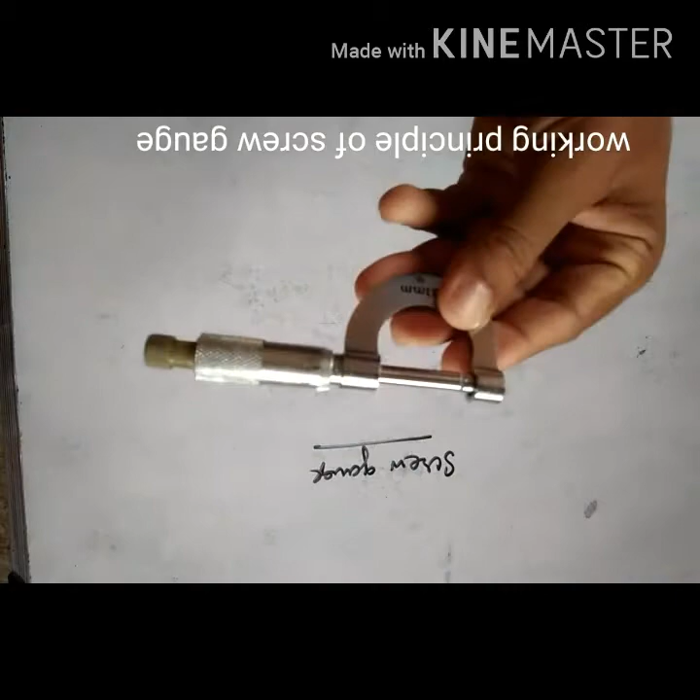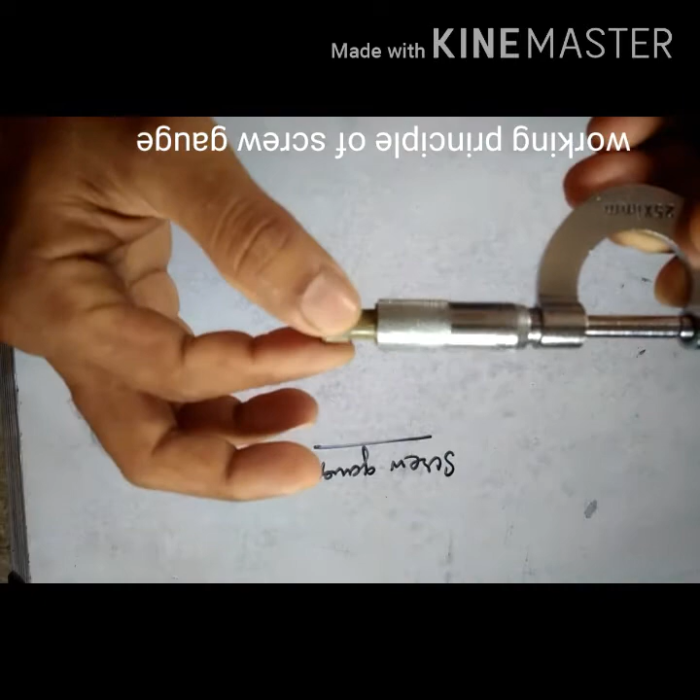Now we are ready to discuss the working principle of the screw gauge. This is the screw gauge, and the screw gauge has a screw at the end of this arm, and with the help of the screw we can rotate the circular scale as well as take the readings. So that is why it is the screw gauge.

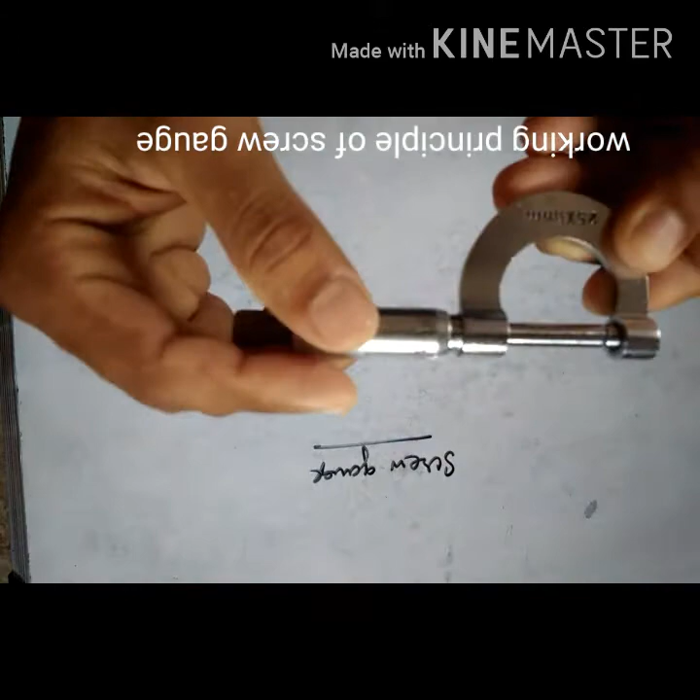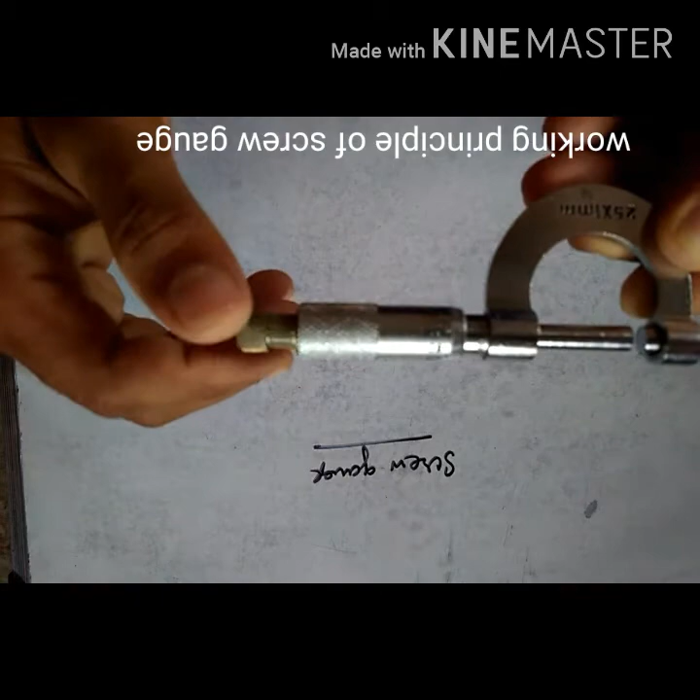When we rotate this side, the gap between these two portions increases. Otherwise we can decrease the gap by rotating the circular scale in the opposite direction. So here we see that the circular scale contains 100 divisions. The numbering starts from 0 here and ends at 100.

For an errorless screw gauge, the 0 mark of the circular scale must coincide with a linear line under the circular scale. So this is 0. Then we read 10, then 20, then 30, then 40, then 50, then 60, then 70, 80, 90, and again comes 0, that is equal to 100. So there are 100 divisions in the circular scale.

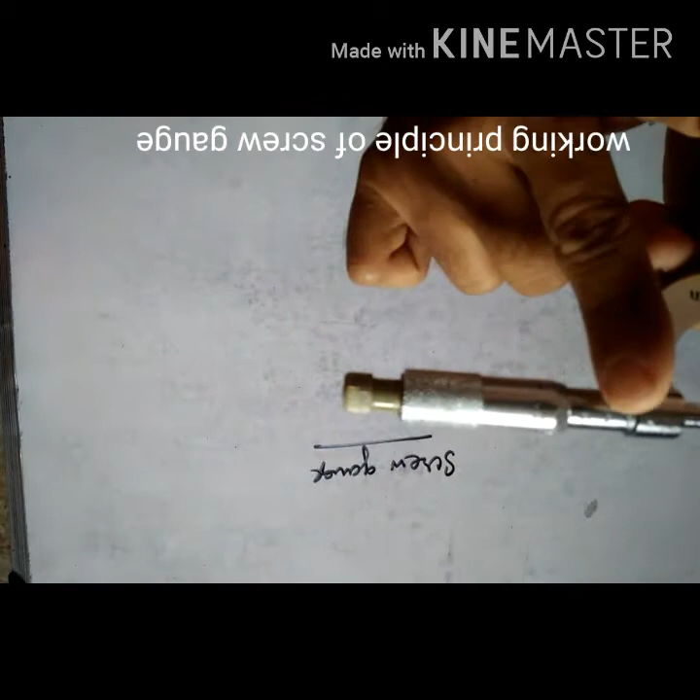And if we coincide the 0 of the circular scale with the horizontal line just under it and rotate just one complete rotation, so it again comes to 0, then only one division of the main scale or linear scale is revealed here. So what is the value of that one division? We can see that this is 0 and this is 5 in the linear scale, just behind this screw. This is the circular scale portion and this is the linear scale portion.

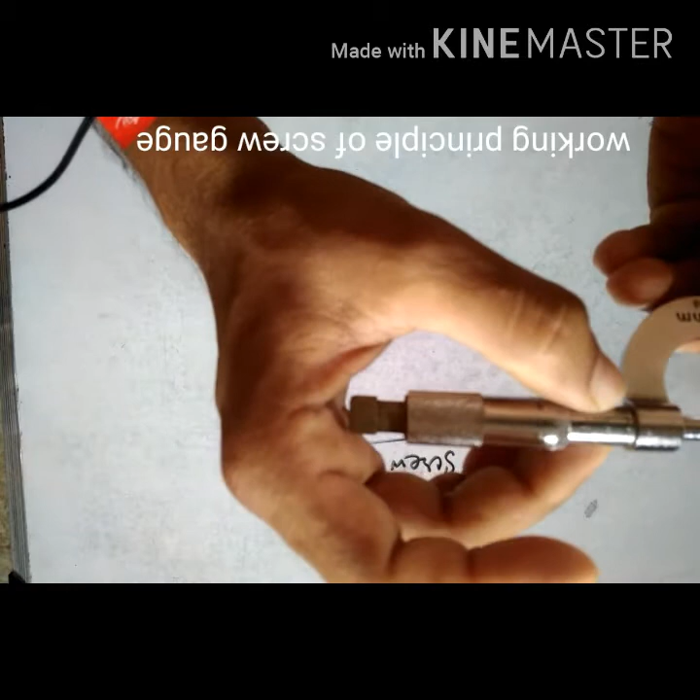And the linear scale contains a millimeter scale and each division is 1 millimeter, that is 0.1 centimeter. So for 100 circular scale divisions rotation, that is for one complete rotation, this is the number of turns. So we can write n equals 100. And when we take a complete rotation of this circular scale, we get a linear displacement of the screw that is called pitch, that is 0.1 centimeter.

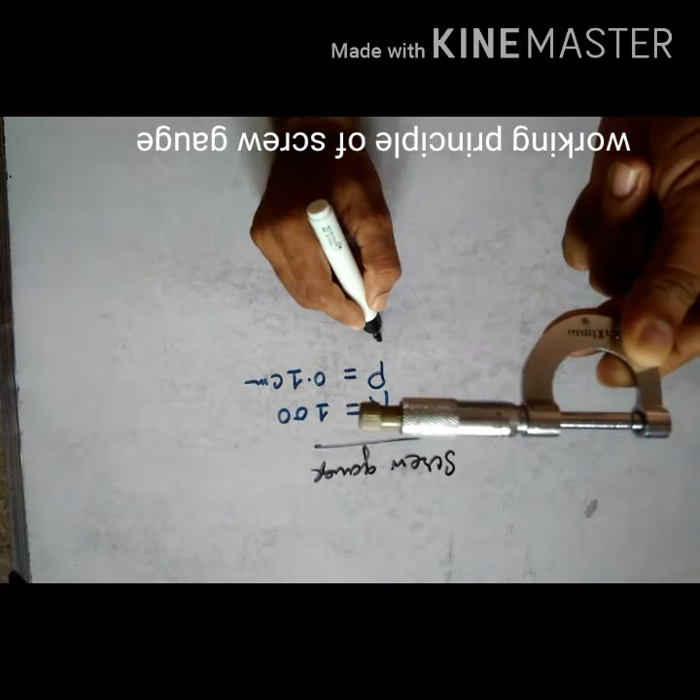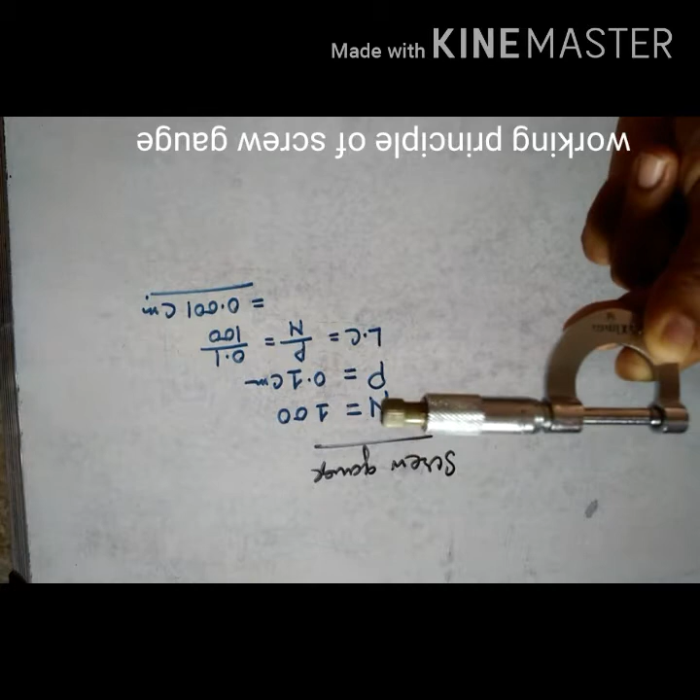Then the least count, that is the minimum length that can be measured by the screw gauge, is LC equals pitch by turns, that is 0.1 by 100, so 0.001 centimeter is the least count of this screw gauge. So it can measure 3 digits after the decimal point.

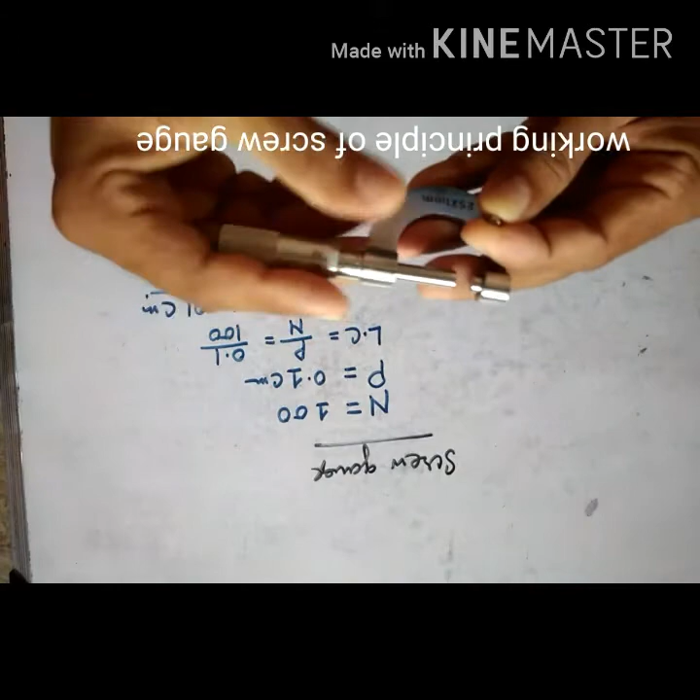Now we are going to measure the diameter of this steel ball. It is very small, and we can accurately measure the diameter of this ball with this screw gauge up to 3 digits after the decimal point. First we make a separation by rotating the screw, and then keep the ball in this gap. We can just fix it here, and

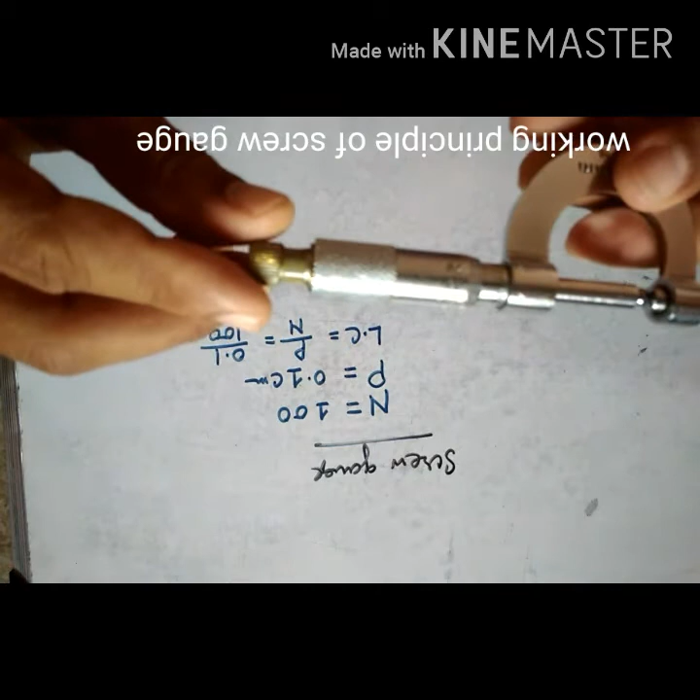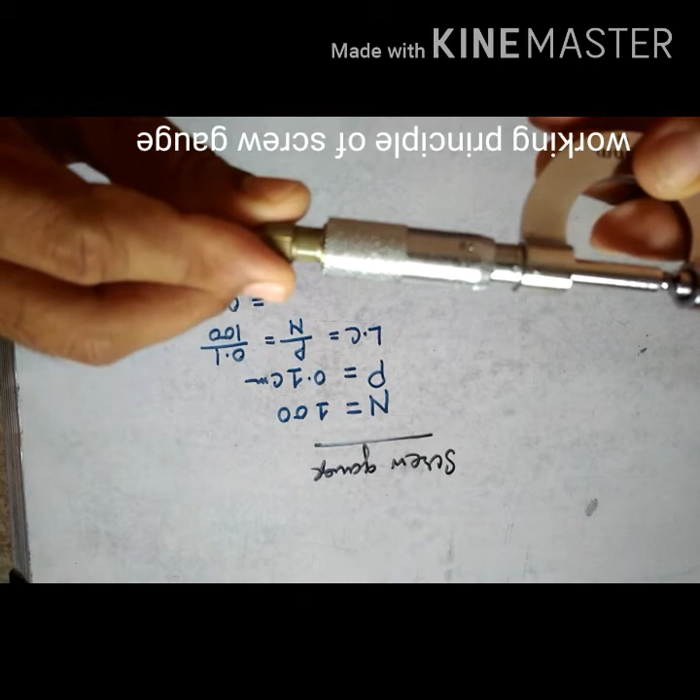here the screw can be rotated 1 or 2 times to hear a sound of tightening. This is the sound one time. This is the sound the second time. So we are sure that it is perfectly fixed for taking the readings. Now what is the reading?

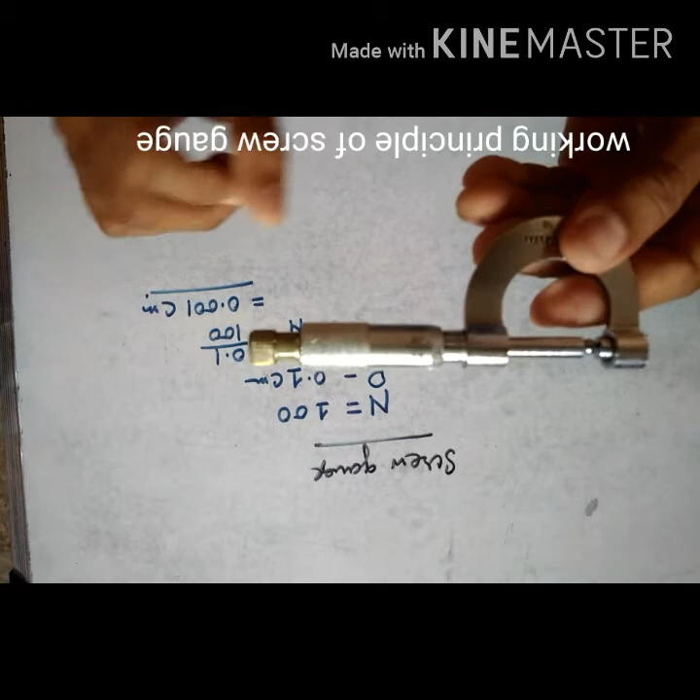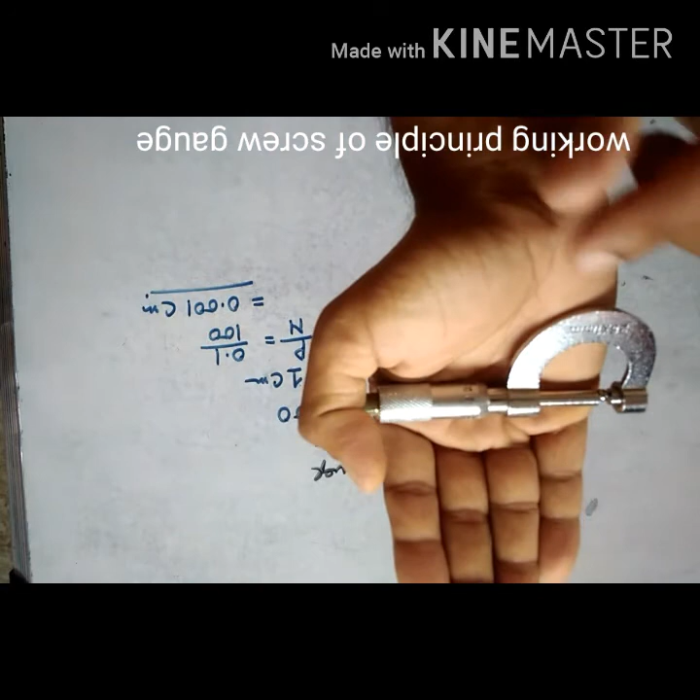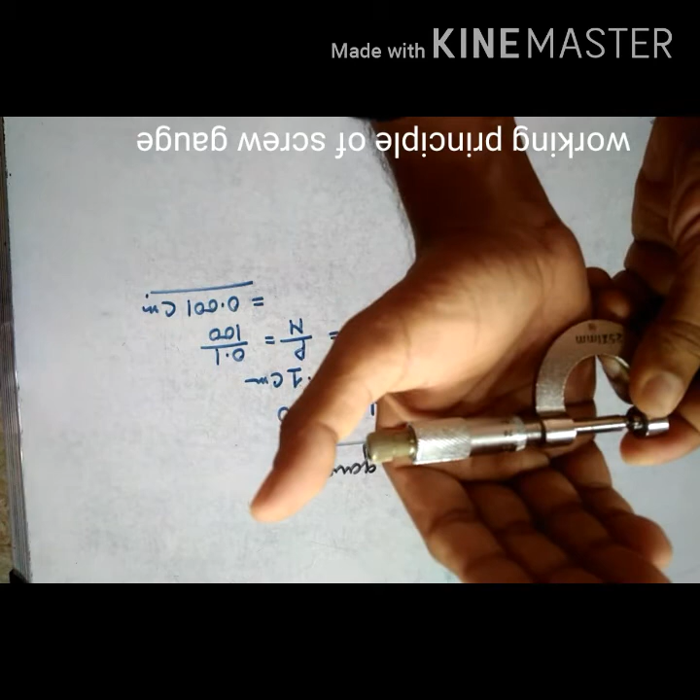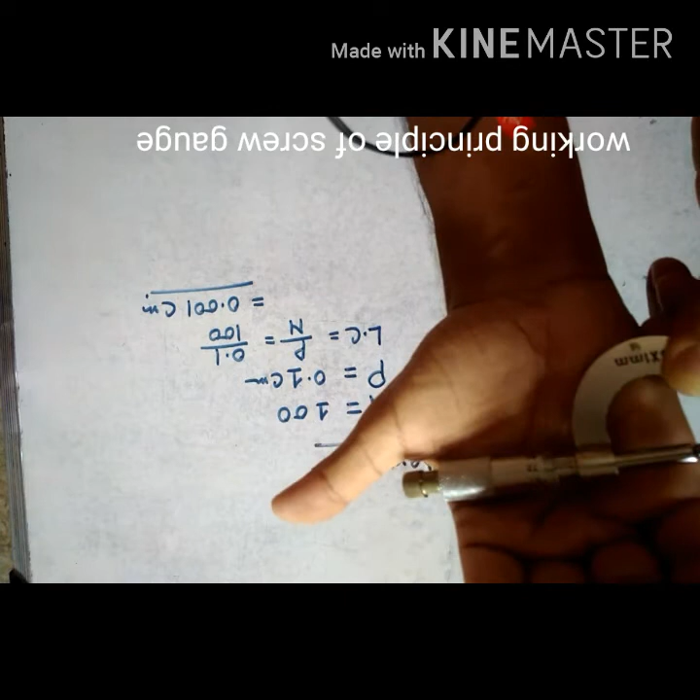Here we see that the linear scale shows 4 divisions. So the linear reading is just 4 millimeter or 0.4 centimeter. So the linear scale reading is 0.4 centimeter.

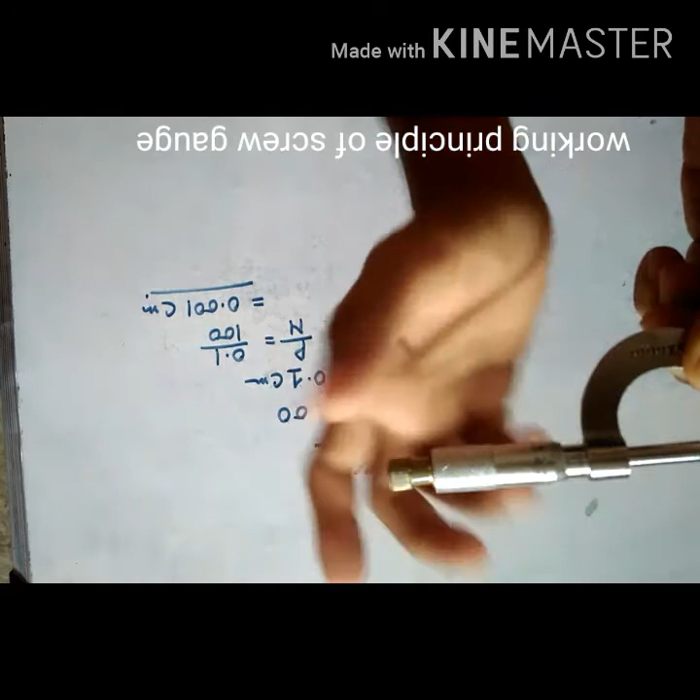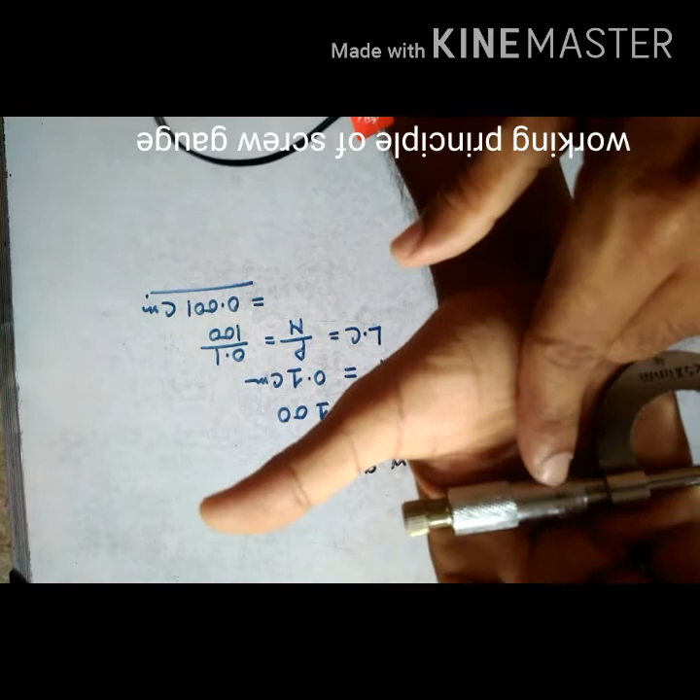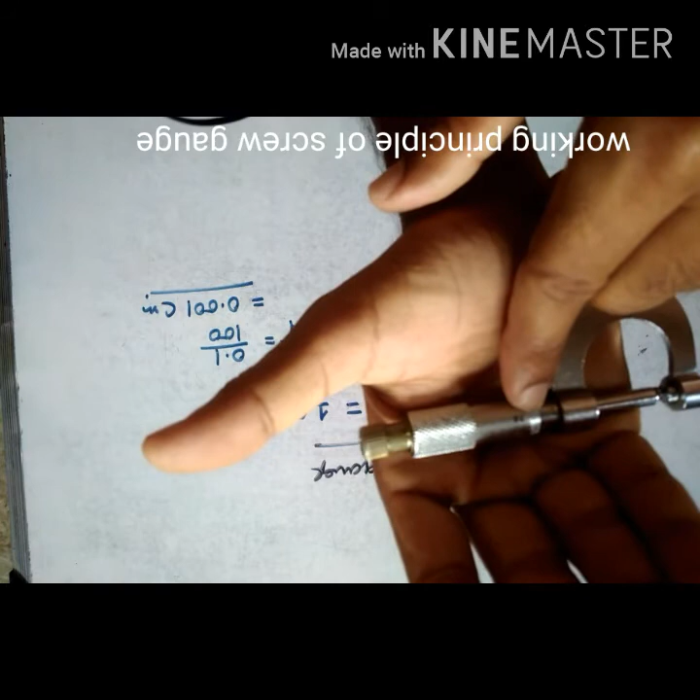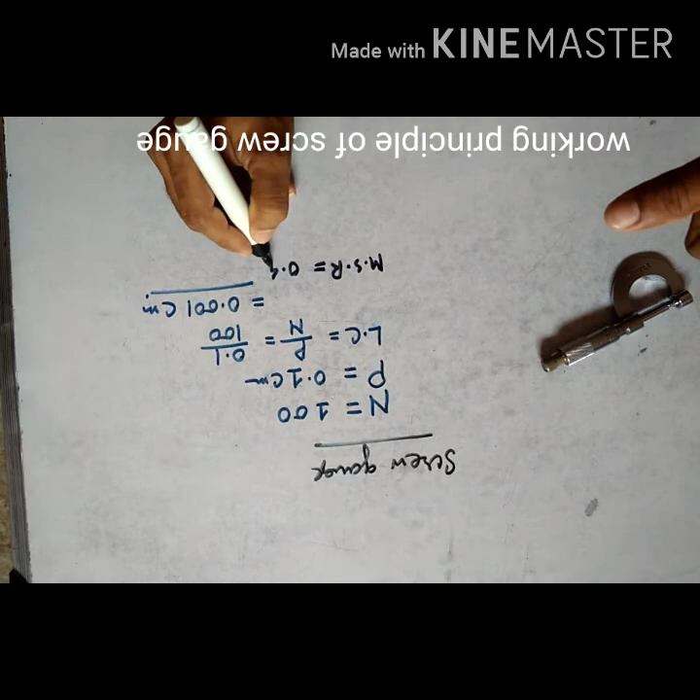And the circular reading is 73. This is 70, and the reading 73 coincides with this horizontal line. So the circular reading is 73. Now we write it here. The main scale reading is 0.4 centimeter and circular reading is 73.

So what is the total reading? The total reading is main scale reading plus circular reading times the least count. That is a very simple process. That is 0.4 plus 73 times 0.001. So we get 0.473 centimeter as the diameter of the steel ball. So this is the process of measuring very small lengths up to 3 digits after the decimal point. So with the screw gauge we can accurately measure a small length.